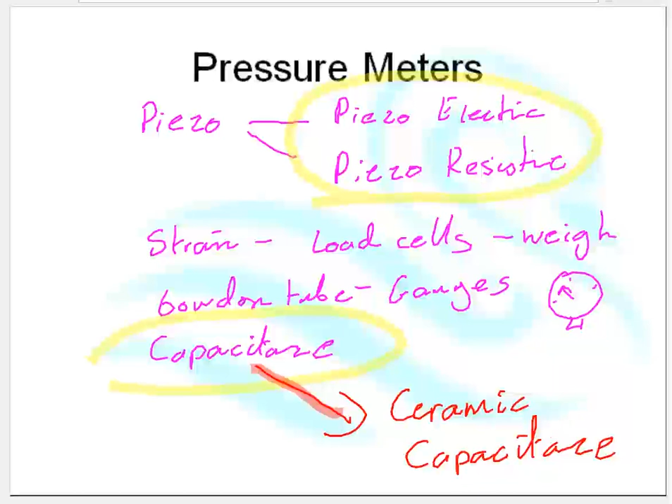we'll probably use, instead of just a straight old type metal capacitance cell. Nowadays, for the last 26 years, we've used ceramic capacitance.

It's called Cerabar by Endress and Hauser. It's called Vegabar by Vega, and I don't know what it's called by anyone else. Rosemount probably call it some crazy idea that they'll be thinking about in 20 years' time, because they seem to be a bit behind.

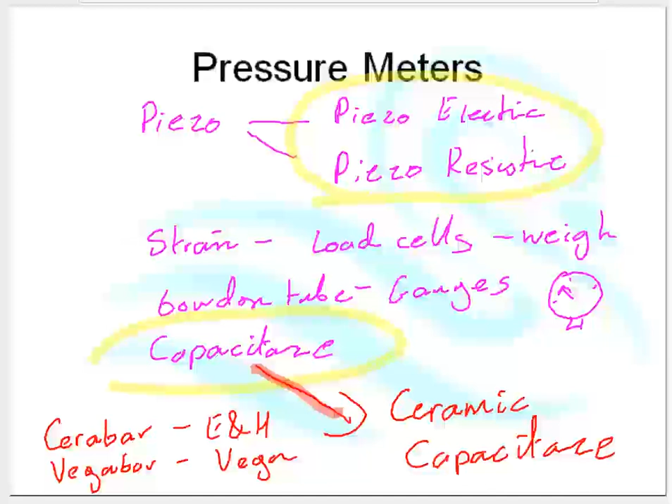So we're using ceramic capacitance or one of the piezoelectric or piezoresistive type sensors. When it comes to choosing pressure sensors, this is the thinking I go through.

I say to myself, is it over 400 degrees C? If it's not over 400 degrees C, if it's less than 400 degrees C, I'm going to use ceramic capacitor.

Now, ceramic capacitor is the diaphragm type. What we have is a very thin ceramic diaphragm and another diaphragm, and then we have a hole through there actually.

There, like that. And there are two capacitive plates, one capacitive plate there and one capacitive plate there, and we measure the capacitance, the movement between those two capacitive plates.

The ceramic diaphragm moves by nanometers, which means about the size of a gnat's thingy. So it doesn't move very much. They're very solid.

So if at all possible, I'm going to go Cerabar. That's going to be my first choice, unless it's incredibly hot.

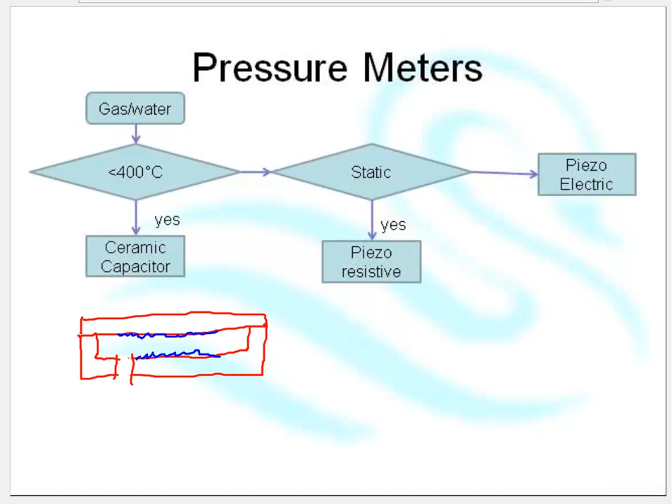If it's incredibly hot, if it's a static pressure I'm looking at, then I'm going to use piezoresistive. If it's a non-static pressure, something like a vibration, I'm going to use piezoelectric.

Piezoelectric is not so good at static pressures because piezoelectric only measures changes in pressure. So my second choice will be piezoresistive. If I'm going very, very high pressures, very, very high temperatures, I'm going to go with piezoresistive.

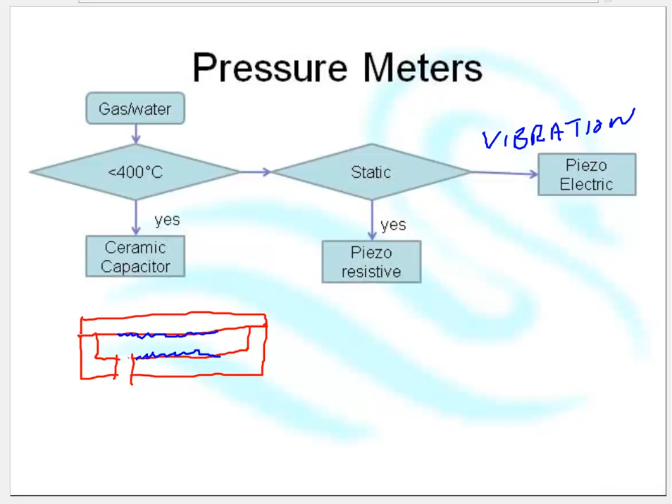But anything less than 400 degrees C, I'm going to go Cerabar. So here we have my steam pressure coming in, and I need you to choose. What would you choose as a pressure sensor?

I was looking for that. I was looking for that. Oh, looks like you found it.

Now think carefully. Steam. How hot is steam going to be? Is it going to be over 400 degrees C?

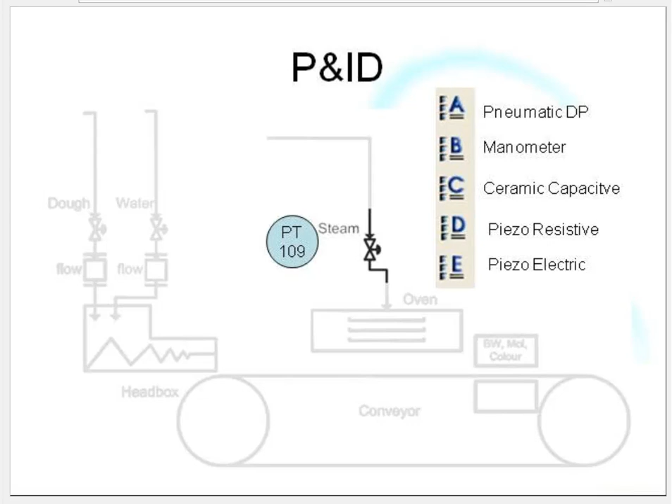Okay, now, it seems the majority of you have plumped for piezoelectric. Piezoelectric is the one we would use if we have high pressures and we're measuring something which is changing a lot, changing very quickly and, well, a lot.

If we have high pressures and high temperatures, we would go for piezoresistive. Pneumatic DP, forget about that. Manometer, we're not going to do that one. We're not going pneumatic because, well, that's the sort of thing we used to do in the last century.

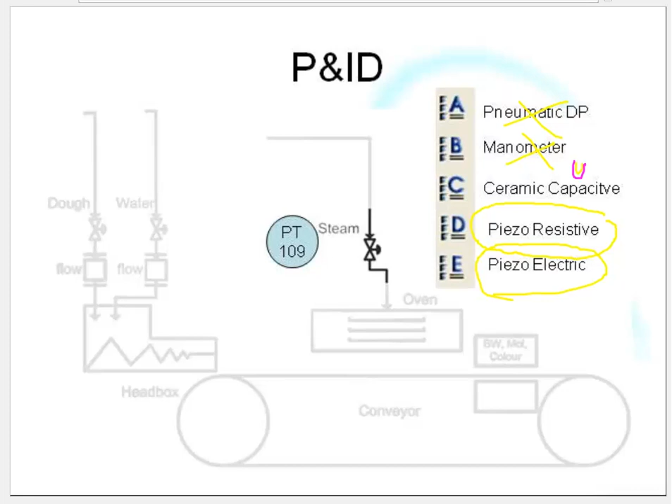Ceramic capacitance, now that is good up to, let's get a better pen color, up to 400 degrees C.

Okay, so being as the steam is only going to be somewhere 100 to 110 degrees C, I'm probably not going to get much more than 10 degrees of superheat in my steam, so I'm going to go for the ceramic capacitance. The reasoning is because it's accurate and it's cheap. They are very cheap, very reasonably priced.

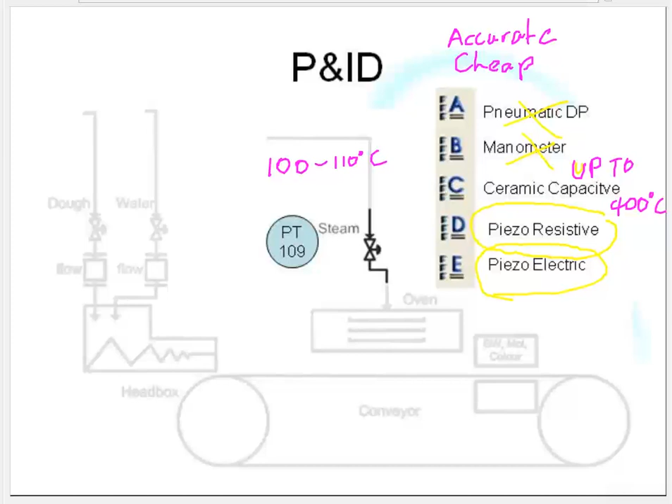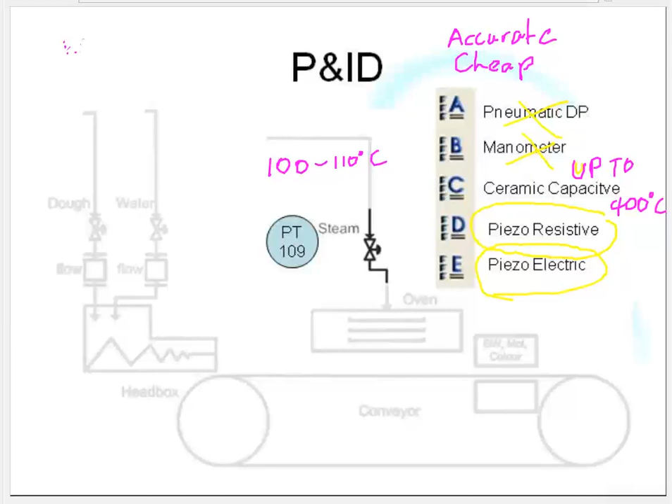If I take steam at 100 degrees C, or 110 degrees C, and I change it into steam at 100 degrees C, I get some energy out.

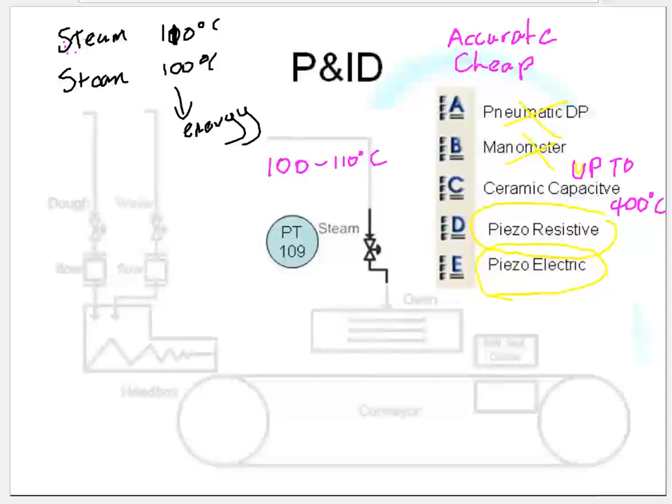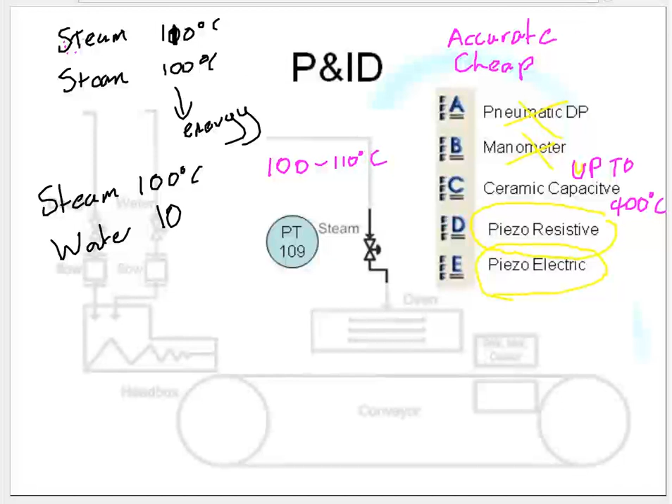However, if I take steam at 100 degrees C and I turn it into water at 100 degrees C, then I get loads of energy out.

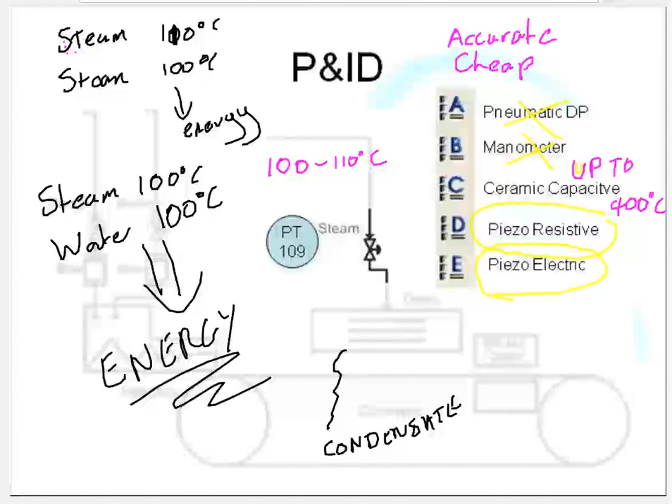So what I'm actually doing is putting steam into the oven and taking condensate out, so I'm generating more heat than you might expect. So my oven is getting good and hot, thank you very much. By changing steam into water, I generate an awful lot of heat, because what I'm doing is liberating the hidden heat from the steam.

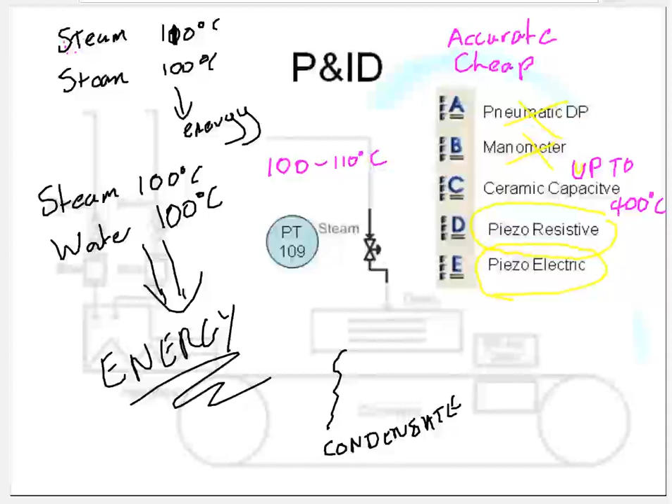Okay, now I want to measure the temperature of my ovens. Some suggestions for temperature sensors, please.

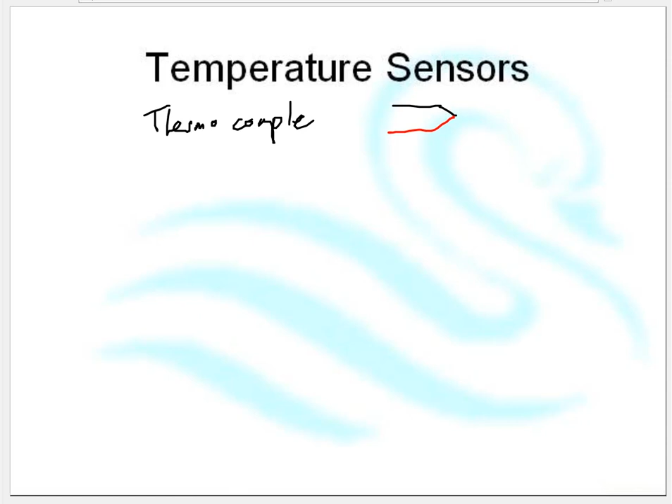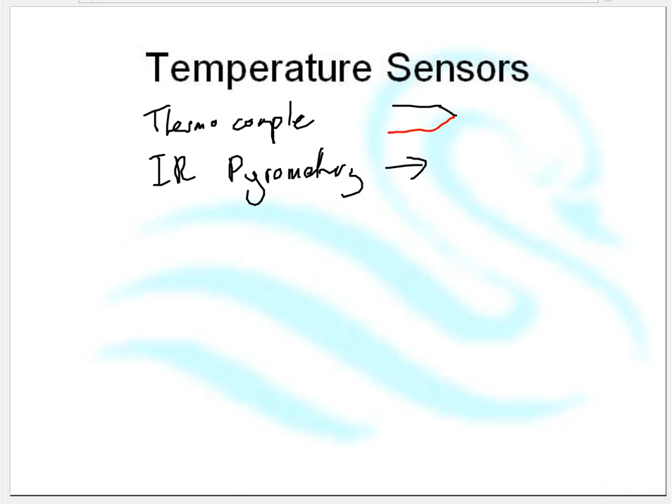So I've got thermocouple, which is 2 different types of metal. I think what you're talking about there is infrared pyrometry. Okay, infrared, and what infrared is really good for is non-contact. Now, when we talked about infrared, we did mention that unless you correctly set up the emissivity, then what you end up reading with an infrared pyrometer is actually the color of the object and the surface.

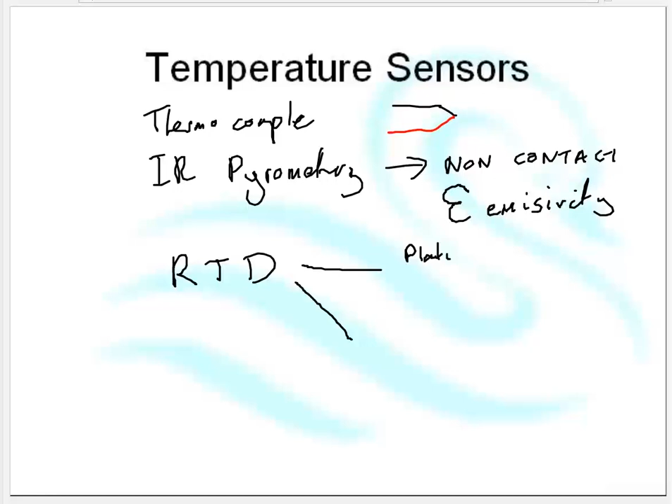I also have some people telling me RTD, resistance temperature devices. There are 2 types of RTD: there's the one that's a piece of wire, typically platinum wire, that's 100 ohms at 0 degrees C - anybody know what that one is called? So I've got platinum wire, and then we have the thermistor. Thermistor, platinum wire, which is called the PT100. So I have the PT100, the thermistor, IR pyrometry, and the thermocouple.

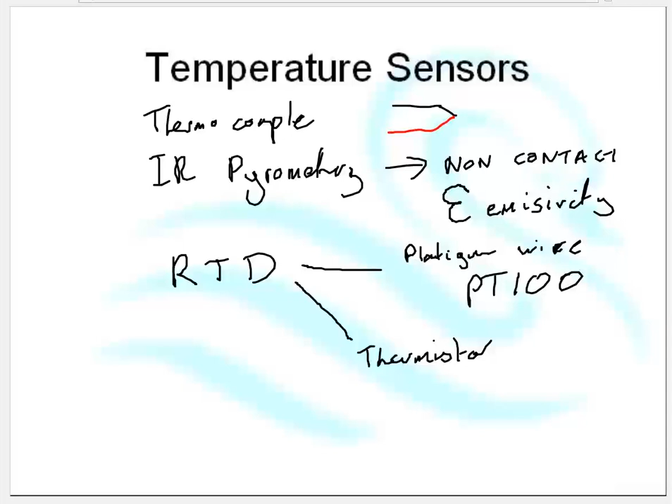And these are the choices I have for temperature sensors. Here's the way my thinking goes: if the temperature is less than 100 degrees C, and I don't want special accuracy - within 0.2 of a degree is good enough - then I'm going to use a thermistor, because a thermistor is as cheap as chips. Thermistors are horrendously cheap, so cheap it's just not funny. So unless there's a good reason, if it's less than 100 degrees C and I don't need great accuracy, I'm going to use a thermistor.

If it's more than that and I need better accuracy - if I need fabulous accuracy and don't care about the expense - then I'm going to use a thermocouple. Thermocouples are expensive to install and expensive to maintain. So if I need great accuracy and hang the expense, I'll use a thermocouple. However, if I need reasonable accuracy, I'll use a PT100. So that's my thinking: if I don't care about the temperature much, I use a thermistor; if I want great accuracy, thermocouple; but if I want good accuracy without great expense, then the PT100.

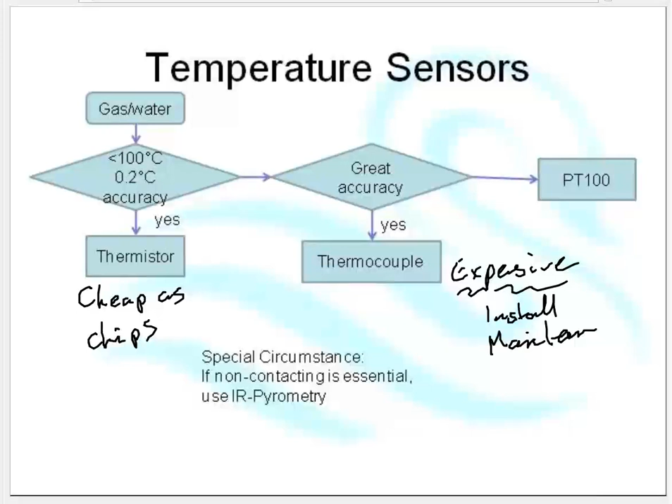So here's my choice here. What I'd like you to do is say what you would choose.

Well, I think you're right, I reckon it's a toss-up between the PT100 and the thermocouple. And all things considered, I don't need fabulous accuracy, so I think on this occasion I am going to go for the PT100.

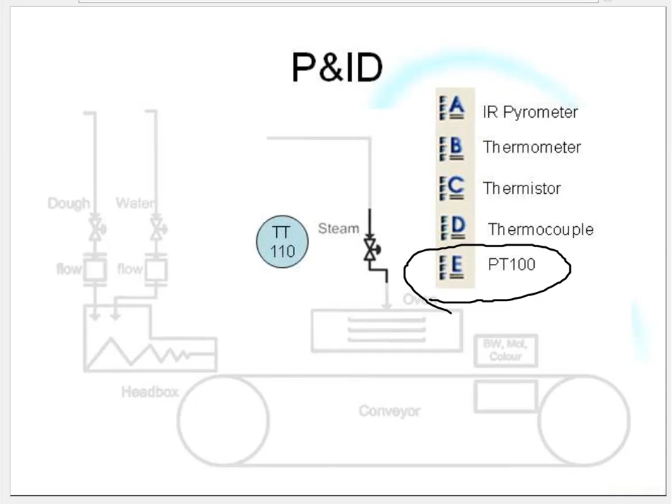Okay, that's our basic instruments done. Now, here's a tricky one: I want to measure the weight of the donuts. Who's got suggestions for measuring the weight of the donuts?

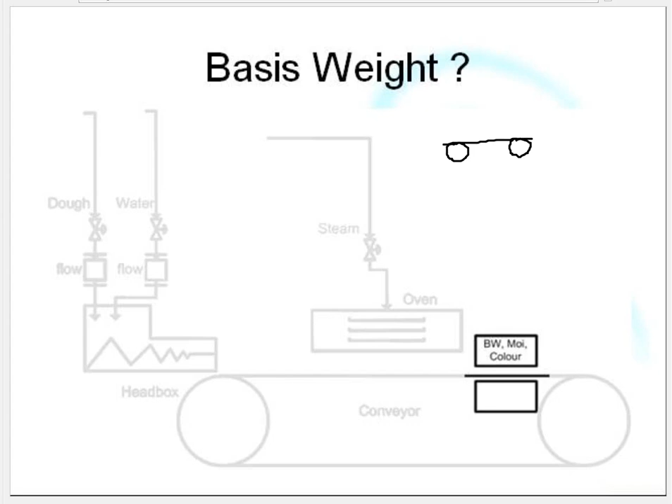Aha, the first thing you come up with is a load cell. The load cell idea is a thing called a weightometer. This is a standard way of measuring the weight of stuff on a conveyor belt. What you do is you have a conveyor belt going past, and one section of that conveyor belt is independently sprung. You put a load cell on that section, and you weigh that section. Now that's fine, and that's absolutely definitely the way we measure stuff on the conveyor belts coming out of mine sites.

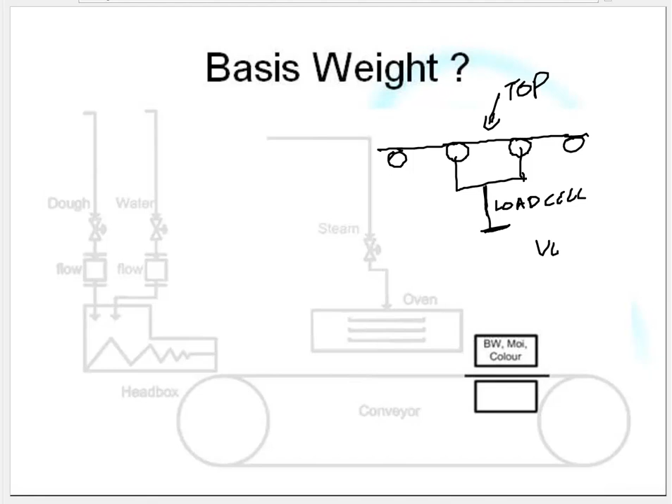Except the criteria for this to work is that the stuff on top must be very much heavier than the belt. Now, unfortunately, in this case, that's not going to work. Any type of weighing system is not going to work, because the donuts really don't weigh very much. The donuts weigh about 100 grams. They're lighter than the conveyor belt they're being carried on. So I have a problem that I can't weigh them using my standard conveyor belt measuring system, a weightometer, because the conveyor belt is going to make a bigger difference than that.

Okay, volume measurement. Now, if we had an even distribution of donuts across the belt, then we could do some type of volume measurement.

Radar. Actually, radar is coming incredibly close to what we will do. Radar is very, very close. The only problem with radar is that radar uses microwaves, and microwaves are specifically absorbed by water. So the radar would tend to be measuring the water weight rather than the basis weight. But you are very close.

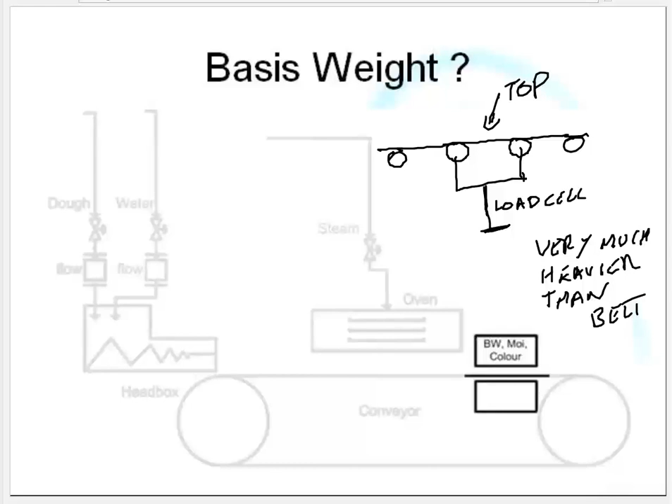Okay, I'm going to put you out of your misery. We have a saying in instrumentation: when all else fails, nuke it. We use radiation to measure virtually everything. There are frequencies of radiation that will be specifically absorbed by certain substances.

For instance, there are frequencies of radiation which are specifically absorbed by cellulose. So we use those frequencies to measure things like paper weight. What we do is we put a radioactive source underneath the thing, we put a radiation detector above the thing, and we measure the amount of radiation getting through. So we put the source underneath, the detector on top, and we squirt radiation through the object. Then we measure how much radiation doesn't get through, because some of the radiation gets absorbed by the object. So by measuring the amount of radiation absorbed, we know the weight of that object.

We use radiation to measure the weight of all sorts of objects. We use radiation to measure the basis weight of paper, glass, plastics, ceramics, anything that's produced on a continuous production line, woven fabrics, non-woven fabrics. Virtually all the clothes you're wearing would have been irradiated, the weight measured using radiation. Any piece of paper you have in front of you, the weight would have been checked using radiation. We use radiation to measure the thickness of chipboard, so that it's thick enough and the correct density, and then we use radiation to measure the thickness of the melamine we put over the chipboard. So we use radiation all the time to measure all sorts of things.

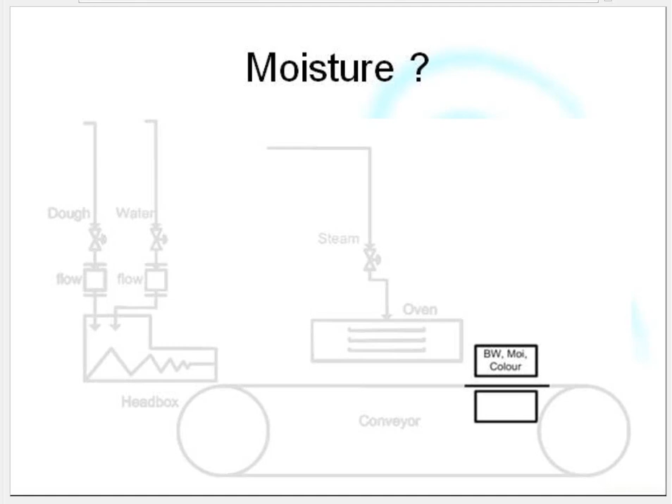And strangely enough, John, you've hit the nail on the head. We'll nuke it. We could eat it, but the feedback from eating it is non-electronic, and it's too slow. So what we're going to do instead is we're going to nuke it.

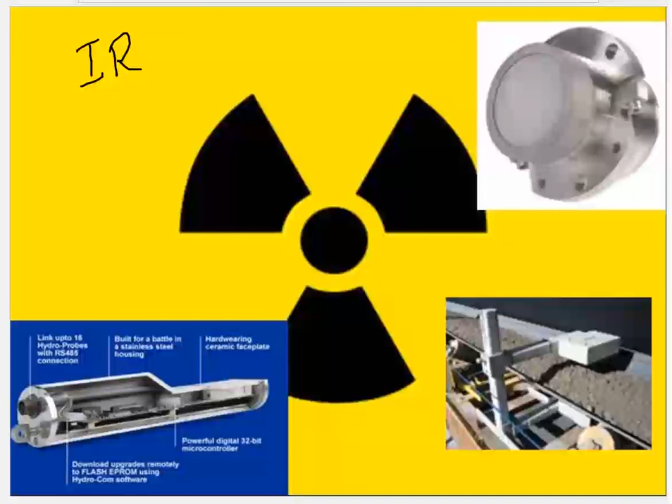There's two frequencies of radiation that detect water, and those two frequencies are infrared and microwave. So what we do is nuke it with microwaves, and we measure how much microwave gets absorbed, because the more moisture there is, the more microwave gets absorbed. So once again, we're going to nuke it.

So we'll end up with a radioactive source and a radioactive detector, with some donuts between: source, detector. Now at this point you may be getting the idea that there's a bit of radiation around the place. Well, there is, and we have to be very careful of this. It's going to be our purview to be looking after these sensors and gauges, and this is something we need to be aware of.

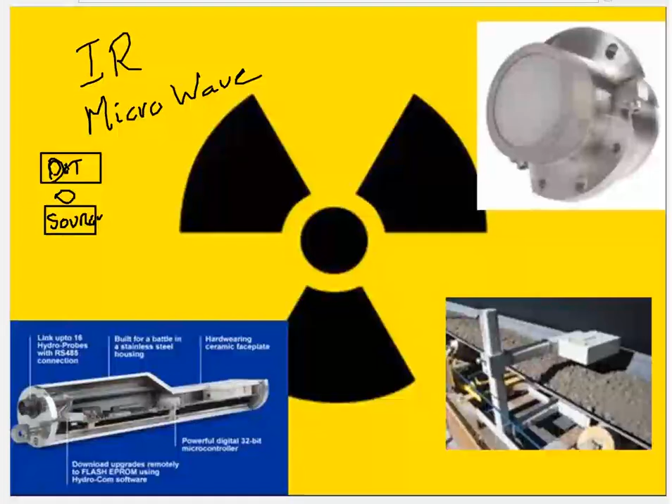Now, I won't go into the colour sensor, because I'm sure as soon as I ask you how to do colour, you're going to tell me to nuke it. In actual fact, nowadays there are lots and lots of colour sensors on the market, very cheap, using the same sort of technology you get in digital cameras and digital video cameras. So there's lots of cheap and easy ways of measuring colour.

So now the mounting of the sensors. Here's my conveyor belt, 3 meters wide. Where shall I put my basis weight, my moisture, and my colour sensors? Where shall I put my sensors?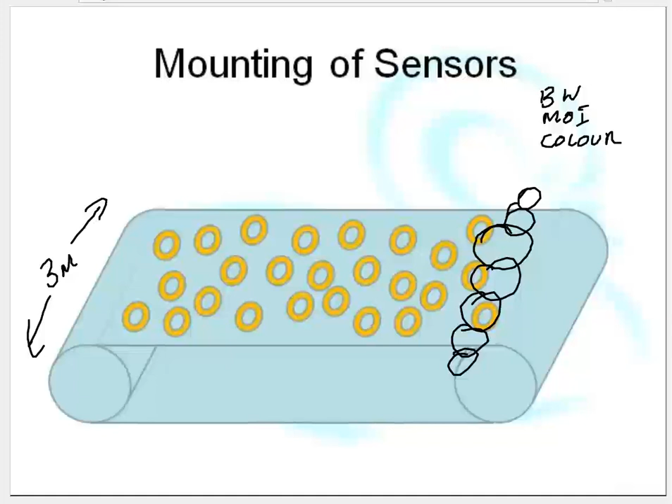So any ideas? Jeffrey, have you got an idea? Yeah, could you just use cheaper sensors, but maybe 3 or 4 of them?

I'd prefer not to. What I'd prefer to do would be to have an accurate sensor that is somehow able to measure the entire belt. I'm not able to funnel the whole process into one stream, because they're laying out on my conveyor belt at the moment. I want to measure them on the belt as it is.

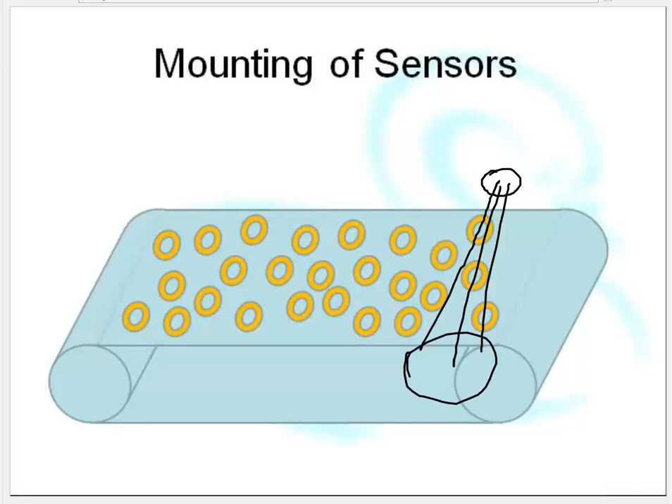I think what Eddie's saying is put a transmitter over there, shining across, and a receiver over here. So there's my transmitter, there's my receiver.

Now, if we're talking about using a radioactive source as a transmitter, then this is horrendously dangerous. This would never be allowed, because you're basically squirting radiation out everywhere. That's not... no, I can't see that one being allowed.

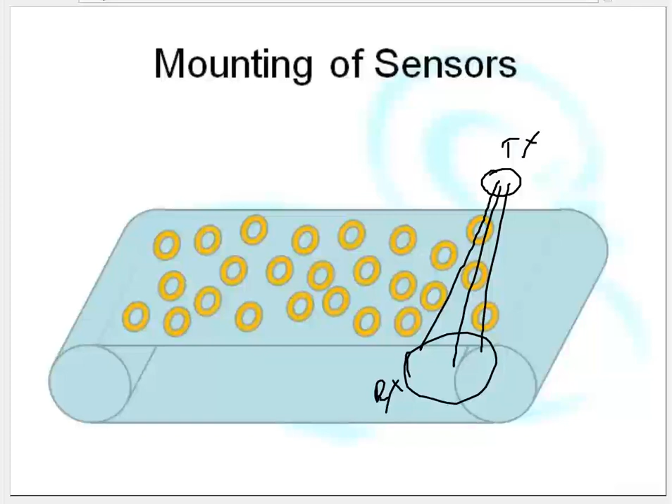Now, you're saying use a sample point. Not sure what you're meaning by that. I'll tell you what, I'm going to put you all out of your misery.

We use a scanner. We put the sensors in a box and we scan it backwards and forwards across the belt. We use scanners for measuring anything that comes out in a continuous sheet or that comes on a conveyor belt. So these scanners, most of these are paper scanners.

This is a Honeywell one here. And this one is made by ABB, it's called an Accuray scanner. These other ones, this is for measuring plastics, and I think that this one is a metal scanner. But they all use the same principle.

We put the instrument package in a box and we move it backwards and forwards using toothed belts. So inside of these scanners we have toothed belts that drive the heads backwards and forwards. And the tooth belts keep the two heads perfectly aligned with each other.

Now, as well as using tooth belts to drive that backwards and forwards, we also need some way of getting the cables from the end over here to the scanner over here. Any idea what we use to get the cables and the pipes?

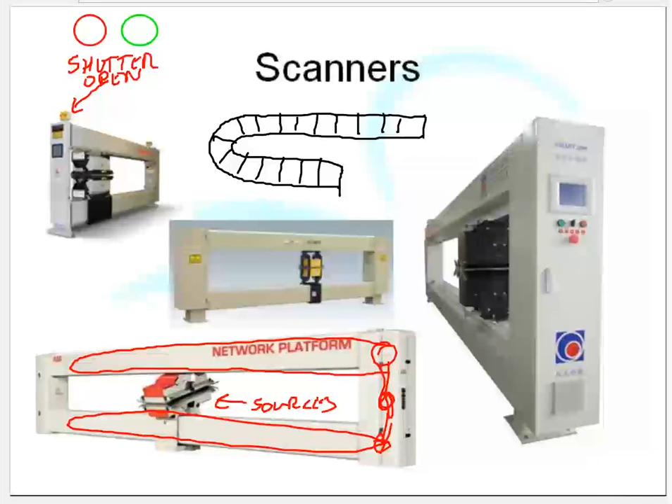Just out of interest, this little box here has got two lights on it - a little red light and a little green light. And the little red light says shutter open. What that means is the radiation is on. When the little red light lights up, the radiation is on. If the little red light goes out and the little green light lights up, that means the radiation is off.

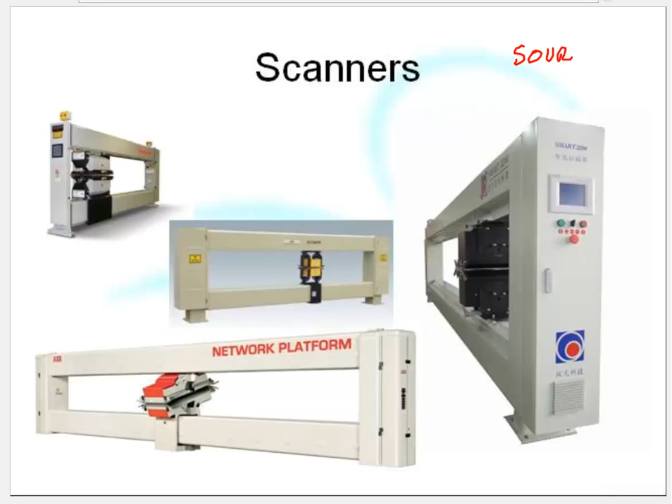Now, one issue with these is if you have a radioactive source - let me just make a bit of space. If you have a radioactive source, I'm going to put a source here. Actually, give myself a new page. If I have a radiation source, I'm going to have that source contained inside a box. And that box is going to be opened and closed by a shutter.

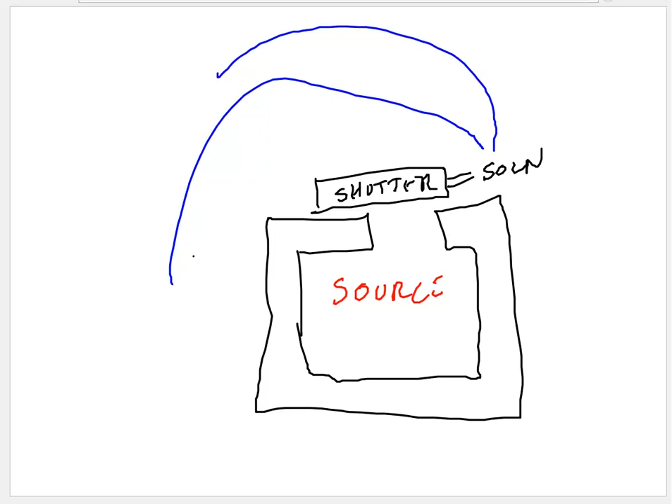The little solenoid which opens and closes that shutter - the wiring for that solenoid, blue for wiring - has to be, by law, in series with the shutter open lamps. So that whenever that shutter is open, the lamps are on. And the shutter is never open if the lamps are not on.

Now, you can probably guess what the biggest failure item in this circuit is. Well, yeah, it's the bulbs, and it's very annoying. You get called in all the time, and you go up to the thing and give it a whack with the back of a screwdriver, and the lamp just comes back on and it's all good. So the biggest call-out item is the lamps, and then just after that it's the solenoid. The source is just a solid radioactive source - that's not going to go wrong.